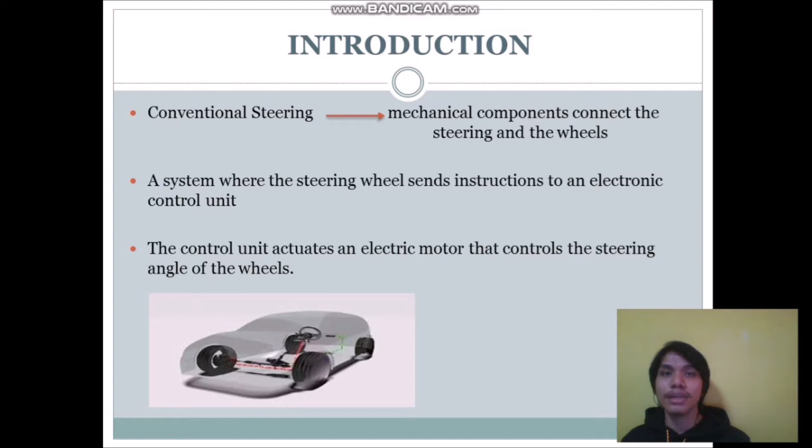So I will further my presentation regarding the paper that I have reviewed, which is the adaptive global fast sliding mode control for steer-by-wire system road vehicles. And for the literature summary, there are three main methodologies used for this research. First, to establish the cooperative adaptive sliding mode observer, and second, based on the best set of estimated dynamics by conducting three maneuvering tests, and also the simulation and comparative study with the other control techniques.

And for the result itself, we will study the vehicle states and cornering stiffness coefficients, estimated SBW system parameters, and sliding gain with the AGFSMC scheme, and also of course the control performance between the AGFSMC, ASMC, and also ATSMC.

So next, for the discussion, the adaptive features of cooperative ASMO and Kalman filter show strong robustness in all three maneuvering tests, and also estimated sufficient dynamics for torque capability, and the proposed AGFSMC is proven to attain a smaller peak tracking error and a faster convergence in comparison with the ASMC and ATSMC, and of course the discontinuous projection mapping, as designed, also effectively managed to restrict the estimation drift problem.

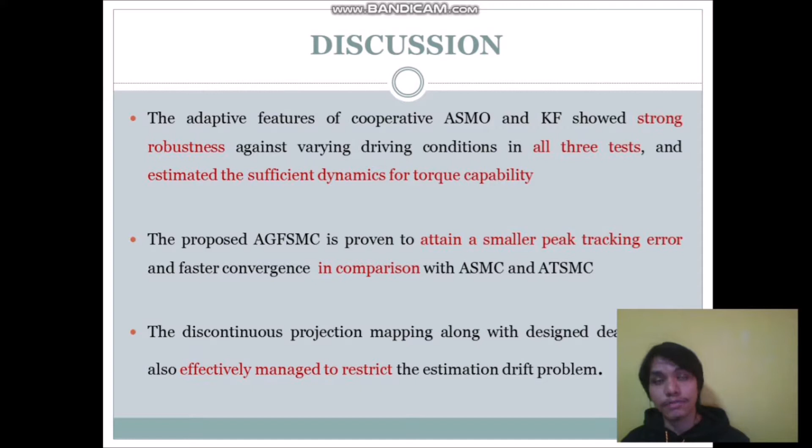And for the conclusion, the estimated dynamics based AGFSMC is designed to adapt to the unknown SBW system parameters, while at the same time eliminating the effect of tire road disturbance forces, and the proposed adaptive global fast sliding mode control AGFSMC guarantees the precise tracking of front wheels and ensures the asymptotic convergence of tracking error.

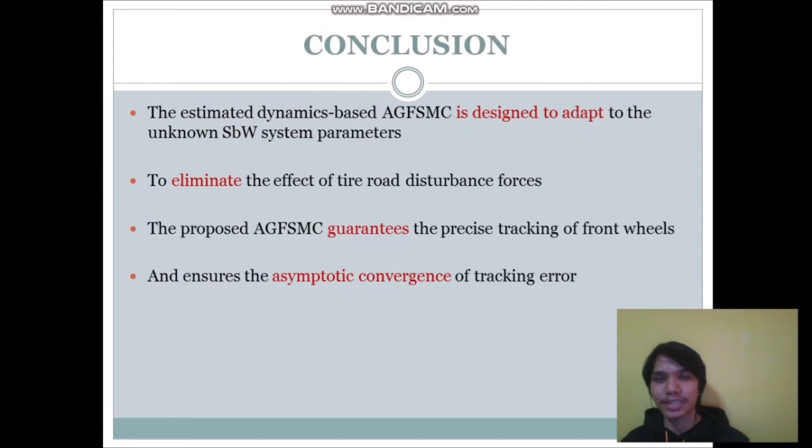Assalamualaikum and good day. My name is Hilmi bin Zainudin, and I will continue this presentation to share my findings about an article on fault tolerance in steer-by-wire systems. This article was created by science and engineering students from Northeastern University, China, in the year 2019. Firstly, I will share about the methodology that they used for their findings.

So firstly, they study the existing component faults and errors in the steer-by-wire system. This includes actuator faults, sensor faults, microcontroller faults, communication errors, and fault tolerance requirements. Next, they review the fault detection and isolation on steer-by-wire by approaching two fundamentals, which are hardware redundancy and analytical redundancy. Hardware redundancy is about adding one or more modules to a specific module, usually in parallel, so that the duplicated output signals can be compared, leading to a fault diagnostic decision. This includes steering motor, feedback actuator, sensor, ECU, and communication protocols.

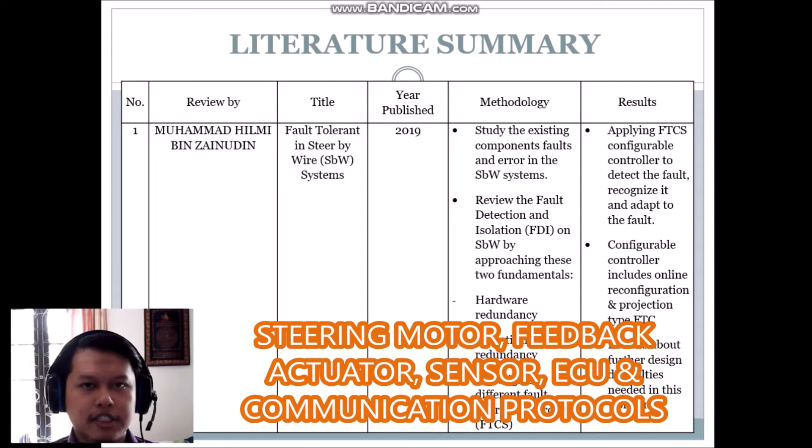While analytical redundancy is to reduce the number of redundant components without compromising reliability of the steer-by-wire system. And lastly, they investigate different fault tolerant controls, FTCS, and make a comparison to provide overall development in fault tolerance of steer-by-wire systems. Now, I will share with you the results they have obtained.

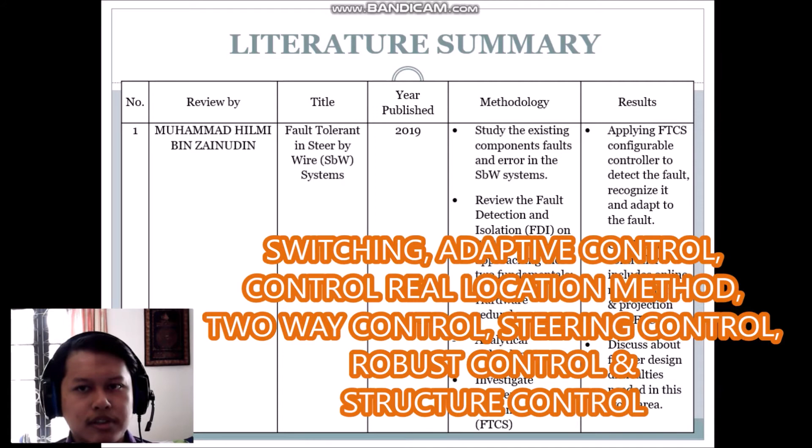The article describes that the best solution is applying a fault-tolerant configurable controller (FTCS) in the steer-by-wire system. This method is divided into two groups, that is online reconfiguration and projection-based FTC. The reason for applying this method is because the FTCS algorithm can detect the fault, recognize it, and adapt to the fault. The controller configuration includes switching, adaptive control, control reallocation method, two-way control, steering control, robust control, and structural control.

So next we can move on to the discussion of this article. There are three discussions. Firstly is the model uncertainty. FTCS design for steer-by-wire systems relies heavily on the fault information provided by the FDI scheme. The problem is that the FDI scheme is built on assumptions of the mathematical model, so there will be an increase in fault detection even when it is unnecessary. To remove the interference of false alarm detection, a robust FDI needs to be studied in depth and applied to this system, so it can provide rapid and reliable detection of system faults with respect to modeling errors.

And next is about the time delay. An increase in communication delay can decrease the reliability of the steer-by-wire system. If the delay exceeds the maximum tolerable response time, the safety of the vehicle can no longer be guaranteed. So the solution is to increase the integrity of the steer-by-wire system. The interval between the fault occurrence and the initiation of the fault-tolerant controller needs to be decreased.

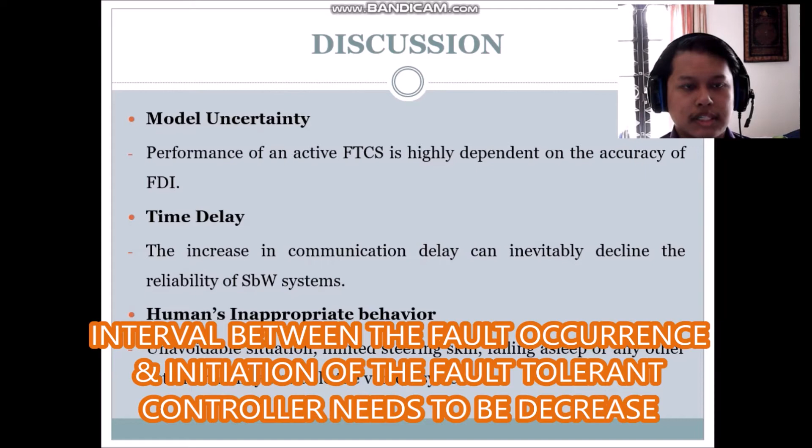And next, we can talk about human inappropriate behavior. So road danger is a man-made crisis. This is because human error accounts for 90% of road accidents.

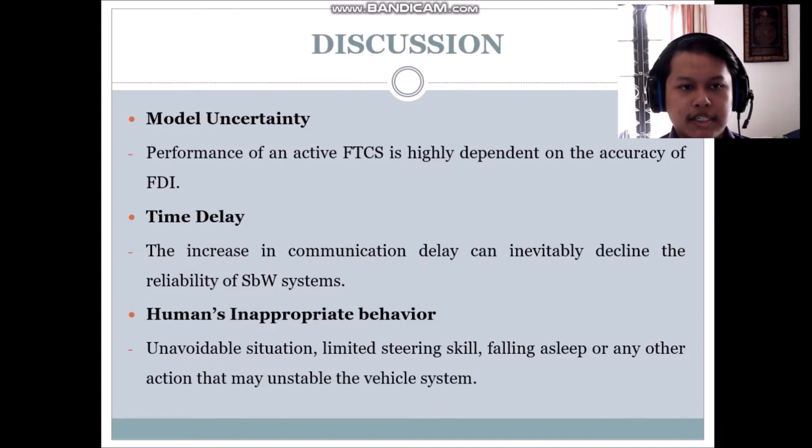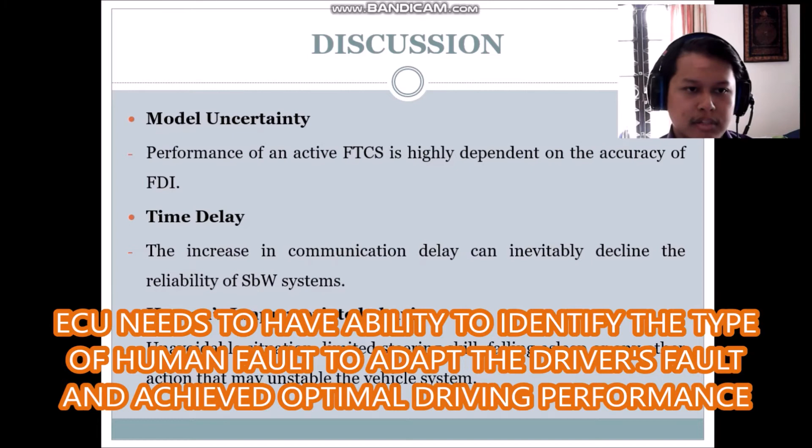Driver faults include unavoidable situations in which the human cannot react quickly enough, drowsiness caused by excessive driving periods, limited steering skill, and falling asleep. Therefore, the system needs to have an ability to identify the type of human fault, and a fault-tolerant control scheme should be designed to adapt to the driver's fault and achieve an optimal driving performance.

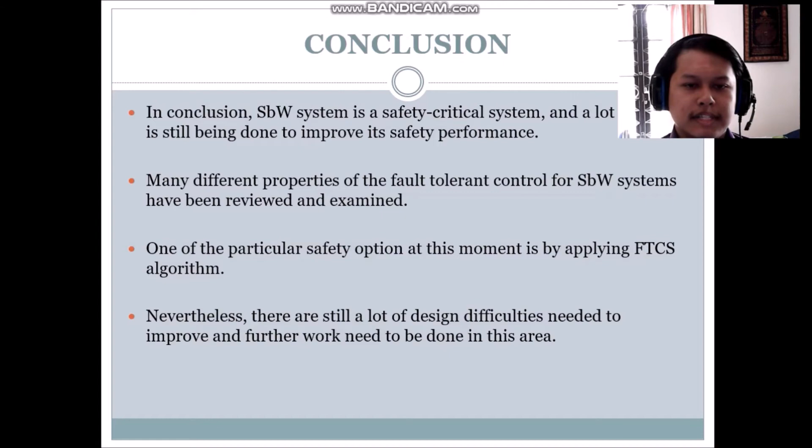For the methodology, the models of the dual motor steer-by-wire system and the vehicle are established. Next, considering the interference of the lateral wind, sensor noise, and the limitation of control output. Next, a sliding mode speed synchronization control strategy. Last but not least, the simulation is carried out using CarSim/Simulink, and the hardware-in-the-loop experiment is conducted based on the dual motor steer-by-wire experimental station.

For the result, the safety of the steer-by-wire system improved. Next, enhance the fault tolerance and reliability of the system. Next, improve the stability and tracking performance of the vehicle. Next, enhance the synchronization performance between dual motors. Last but not least, the effectiveness and good control performance of the proposed control strategy.

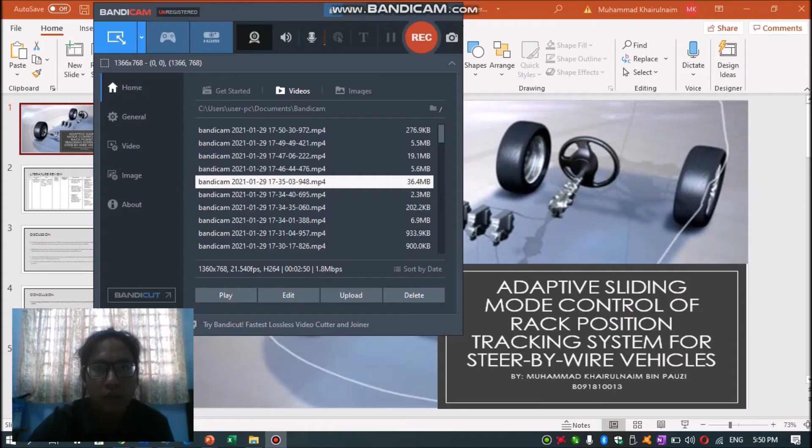For the result, the adaptive sliding mode control algorithm can effectively compensate for the rack force acting as a disturbance. Secondly, the tracking performance at zero vehicle speed is improved by use of the proposed stiffness model. Lastly, control performance of adaptive sliding mode control.

For the discussion, a dynamic modeling of a steer-by-wire system has been studied and an adaptive sliding mode control algorithm has been proposed to cope with various road surface conditions. The ASMC algorithm replaces the lateral tire force with a stiffness and changes the value of the stiffness coefficient according to the road surface condition through the adaptation law.

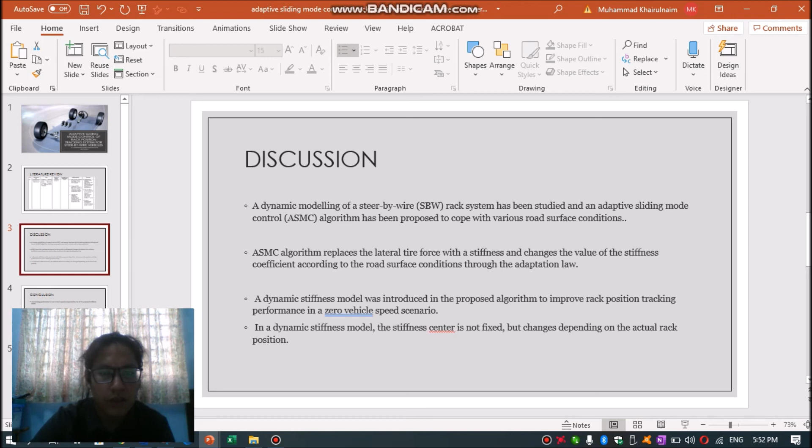For the conclusion, we can say the tracking performance at zero vehicle speed is improved by use of the proposed stiffness model. Secondly, the adaptive sliding mode control algorithm can effectively compensate for the rack force acting as a disturbance. Also, the proposed algorithm ensures the tracking performance in various road conditions without using any road surface information. Lastly, more research is needed to develop schemes that integrate systems to achieve high level performance objectives.